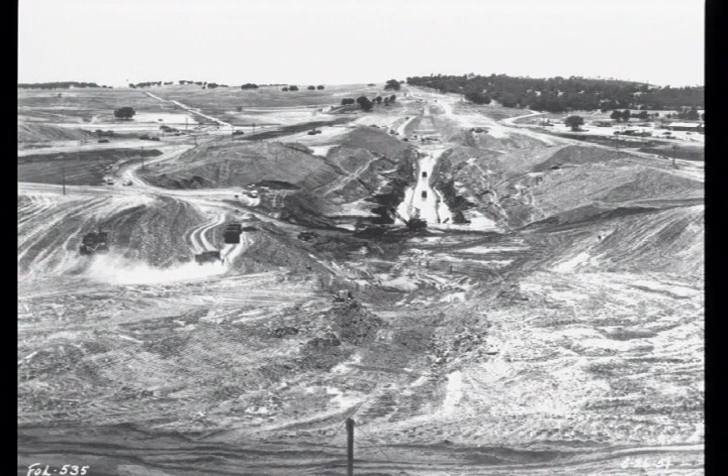Because removing and replacing large quantities of foundation materials is very expensive, the usual solution has been to leave natural soils in place under parts of the dam. Until the early 1970s, it was common practice to leave apparently competent soils in place under the dam. These alluvial soils, which contain large amounts of sands and gravels, were deposited by the river or stream that was being dammed. Sands and gravels that are deposited by running water are relatively less dense than soils that develop in place. When they are exposed to moderate to large earthquakes, these sands and gravels may lose strength because they liquefy.

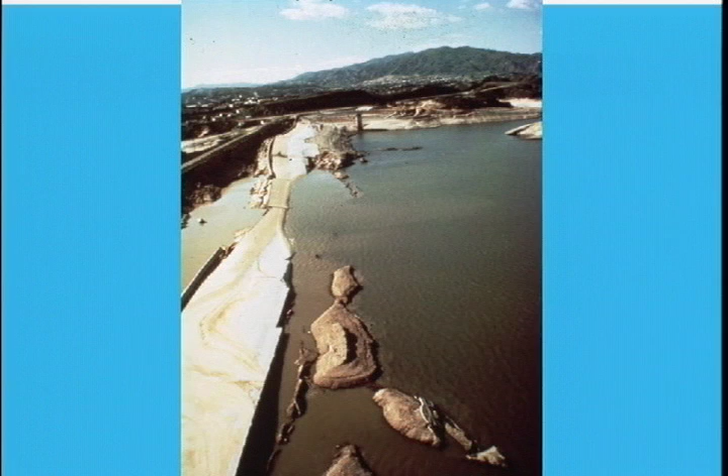Engineers began to explore and understand this condition in the 1960s, and their initial understanding was supported by the San Fernando earthquake of February 1971. That earthquake nearly failed the lower San Fernando Dam and damaged the upper San Fernando Dam. Over 80,000 people were evacuated from their homes while the reservoir was lowered to a safe level under emergency conditions by using large pumps. This event brought about the reevaluation of dam safety criteria and re-examination of the designs of existing dams exposed to earthquakes in the United States.

As the liquefaction phenomena was better understood, it became apparent that natural materials left in place under many dams could not support them during an earthquake. These dams would have to be modified to protect public safety and maintain the water levels required for water storage, recreation, flood control, and hydropower generation.

The modifications could generally be of two types. One would be to completely remove and replace all the liquefiable soils in the dam foundation. This usually involves excavating the dam to gain access to the foundation, a time-consuming and costly effort that often requires lowering or draining the reservoir. Typically, this approach can require that large amounts of foundation soils be excavated and replaced. A variation of this method is to excavate less soil and replace it with a structural element of some kind that is stronger than soil.

The second method involves improving the strength of existing foundation soils. This method can often avoid having to excavate the dam and foundation or lower the reservoir. These incentives have resulted in several methods of improving soils in situ being successfully used to modify dams to resist earthquakes. We are fortunate to have one of the leading authorities in the field of modifying soils on site, Dr. James K. Mitchell, discuss the general field of ground improvement in this set of videos.

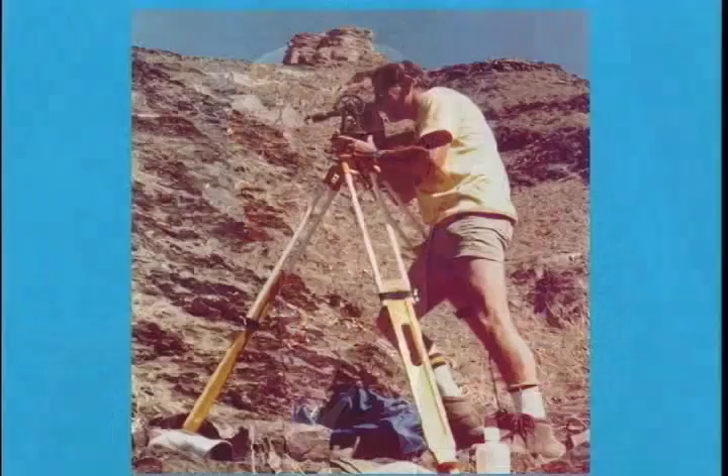Professor Mitchell received his science doctorate from the Massachusetts Institute of Technology in 1956. He then spent several months at the Waterways Experiment Station in Vicksburg, Mississippi. This was followed by active duty with the U.S. Army Corps of Engineers before joining the faculty at Berkeley in 1958. A member of both the U.S. National Academy of Engineering and the National Academy of Sciences, Dr. Mitchell's achievements have been recognized by many awards.

These include the following from ASCE: the Norman Medal twice, the Middlebrooks Award 3 times, the Walter L. Huber Research Prize, and the Karl Terzaghi Award. He delivered the 1984 Karl Terzaghi Lecture and the 1991 Rankine Lecture. He did extensive research on lunar soil properties and served as principal investigator for the soil mechanics experiment, which was part of the Apollo moon missions 14 through 17.

NASA awarded him the Medal for Exceptional Scientific Achievement for this work. Dr. Mitchell has been active in a number of professional societies. He is a fellow and honorary member of the American Society of Civil Engineers. He has chaired the Geotechnical Board of the U.S. National Research Council, been vice president of the International Society for Soil Mechanics and Foundation Engineering, and has served on and chaired a number of other committees.

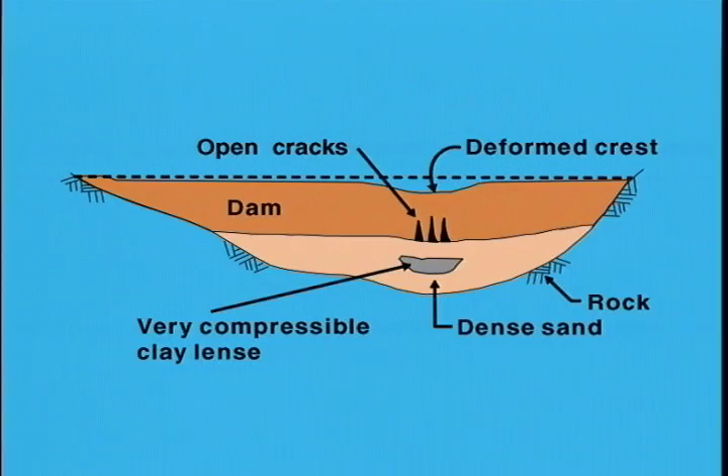Embankment dams founded above thick layers of alluvial materials are likely to utilize upstream blankets or deep cutoff walls for seepage control. Both the blanket and the embankment may be susceptible to cracking as a result of differential settlement in the foundation, drying, or settlement of the embankment and core. These problems are aggravated if the foundation materials are highly compressible.

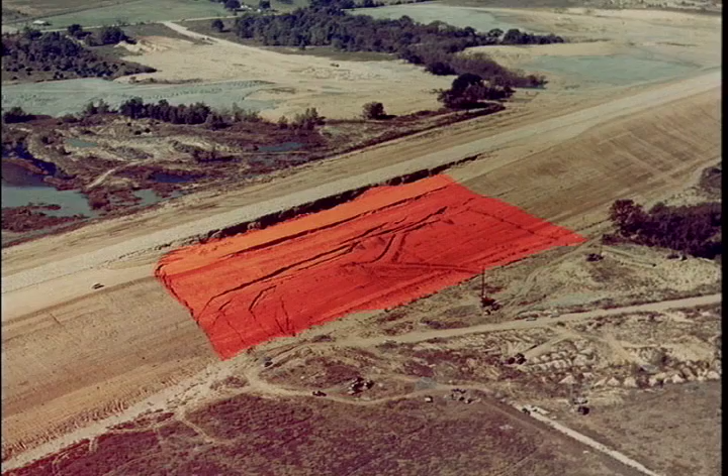In addition, if the foundation soils are weak, there may also be risk of bearing capacity or stability failure beneath the embankment toes unless rather flat embankment slopes are used. Weak layers in the foundation may be the source of instability, as shown in the photograph of the failure at Waco Dam in Texas. Excessive creep deformations in the foundation clays at the tar sands tailings dam in Alberta, Canada, have resulted in significant horizontal displacements of the embankment.

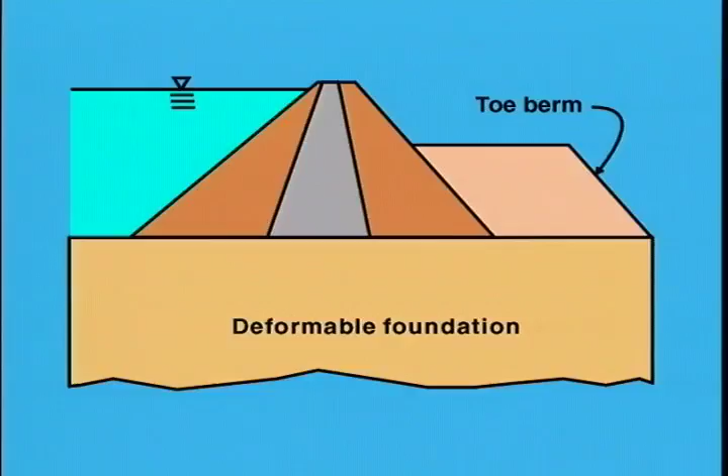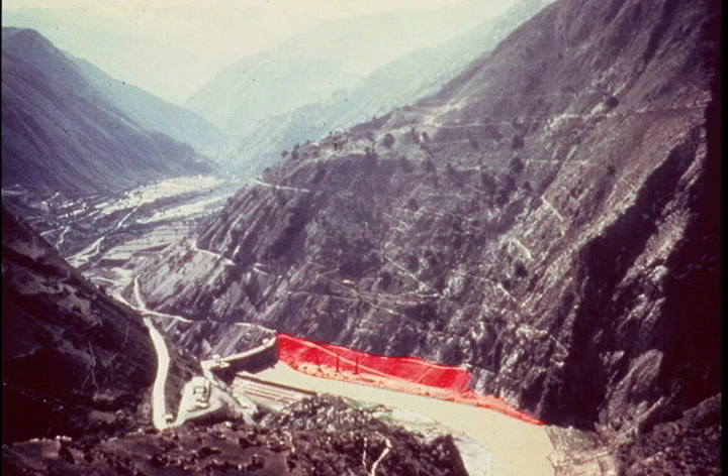The toe berm at the base of the steep slope at the Tablachaca Dam in Peru, shown in this photograph, was one of several slope stabilizing measures used for protection of the dam and the reservoir. In some cases, however, reservoir restrictions, hydraulic constraints, or space limitations may not allow for these solutions, and other treatment methods may be required. Several forms of ground modification may be used to stiffen and strengthen the ground, including densification, cementation, and reinforcement. The methods selected in any case will depend on the soil types and stratigraphy, the depth of treatment required, and whether a site is being prepared for a new dam or an existing dam is being retrofitted.

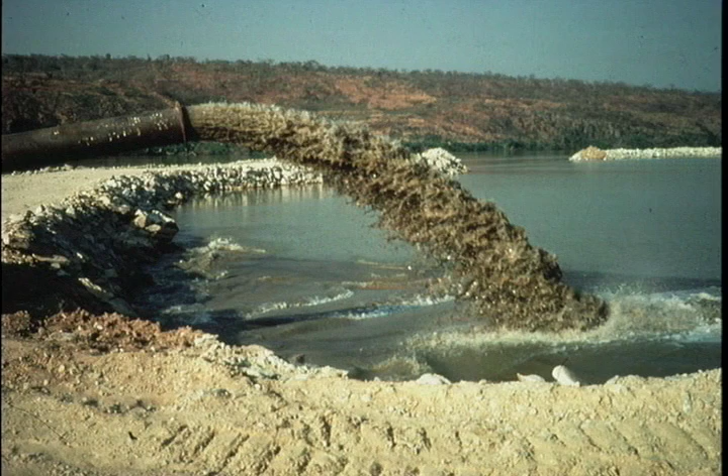Although unlikely to be a problem in properly designed and constructed new rolled fill dams, the embankments of some dams may be susceptible to failure, especially in the case of hydraulic fill structures. Many older dams were constructed of hydraulic fills, and hydraulic filling is the most widely used method for construction of tailings dams. Hydraulic fills, because of their loose and potentially liquefiable state that results from the depositional process shown in this photograph, are susceptible to sudden collapse and flow failures. The Fort Peck Dam failure on September 22, 1938, is a good example of this.

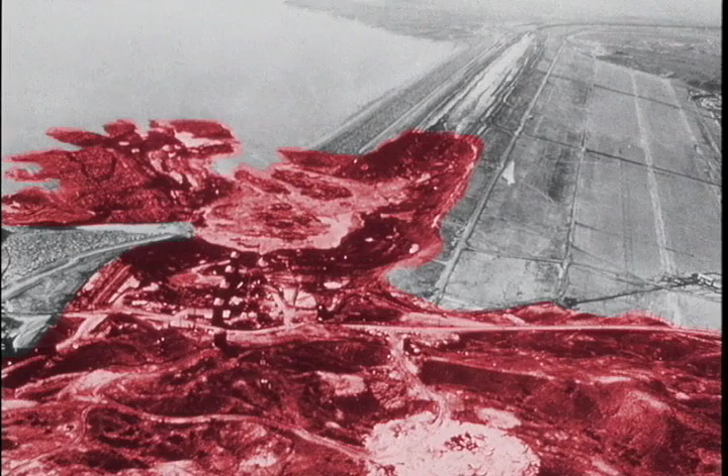Embankment construction by the hydraulic filling method had reached within about 20 feet of the design crest elevation. More than 5 million cubic yards of material moved upstream in a period of about 10 minutes. 8 workers lost their lives in the event.

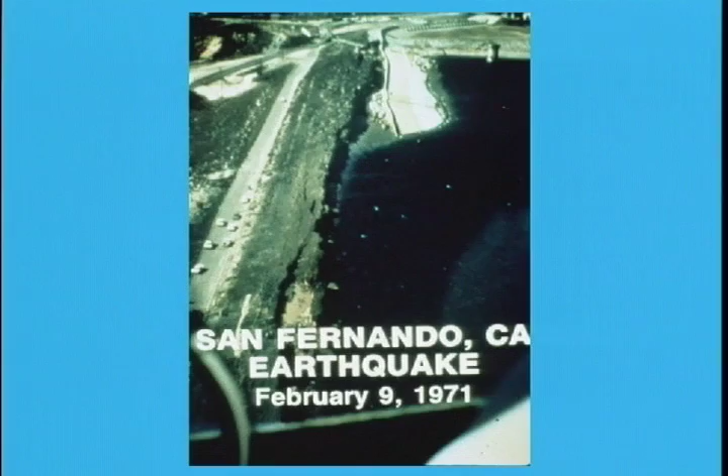Flow failures may be triggered by excessive static loading, as was the case for the Fort Peck Dam failure, but more often they are caused by seismic events. Some examples of dam failures caused by earthquake shaking include the Hebgen Dam, Montana failure in the magnitude 7.5 to 7.8 earthquake in 1959, the El Cobre Dam failure in Chile in 1965, and the Lower San Fernando Dam failure in Southern California in 1971.

In this video, I examine methods and designs for ground improvement to reduce damage and to prevent failure resulting from the above causes: settlement and excessive deformation under static load, and liquefaction flow and stability failures under dynamic or earthquake load. I will not discuss the investigations and analyses that must be made to see if there is a problem. Rather, I assume that the existence of inadequate embankment or foundation conditions has been confirmed.

I will not consider the common treatments and components of dams, such as grouting, cutoff walls, and filters, that are associated with foundation preparation and seepage control. These are thoroughly described by Peck, Deere, and Lowe in other videos in this series. I will, however, touch on the use of soil cement and roller compacted concrete in hydraulic structures. These materials can provide economical and structurally sound components for both the rehabilitation of existing dams and for new dam construction.

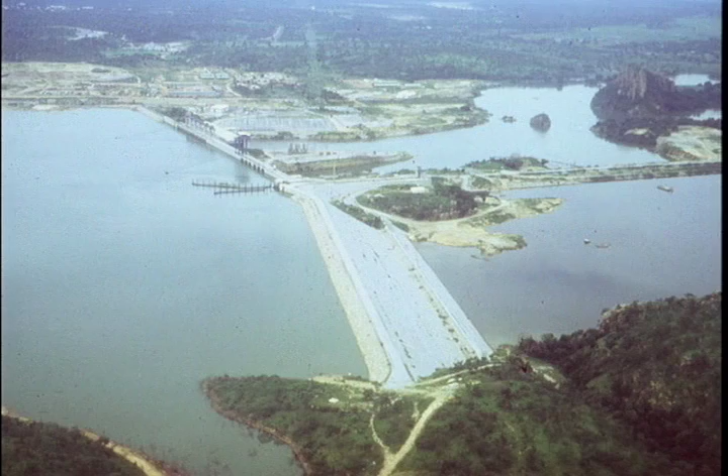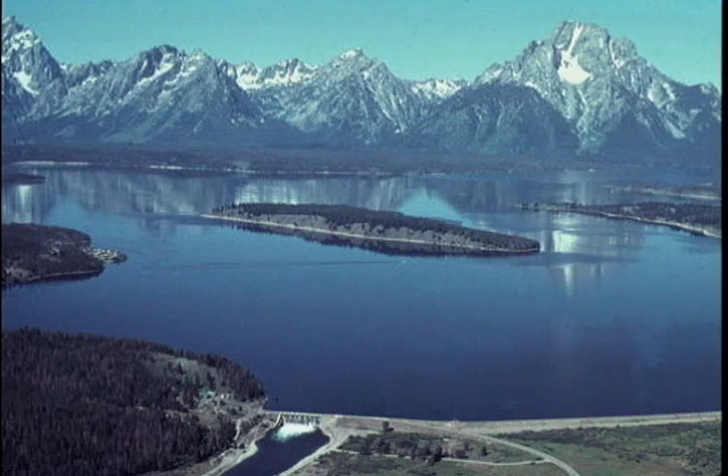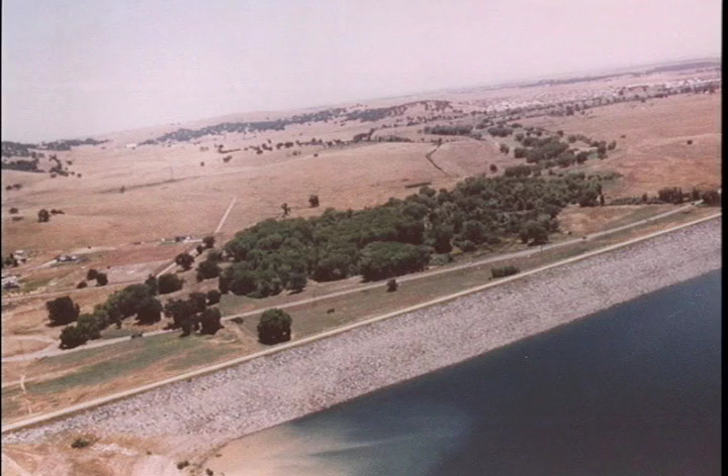Second, the Jackson Lake Dam, Wyoming. Here, an existing dam was replaced following foundation improvement using deep soil mixing and deep dynamic compaction. And third, the Mormon Island Auxiliary Dam, which is an example of the use of deep dynamic compaction, stone columns, and drains to mitigate the liquefaction risk to an existing dam foundation.

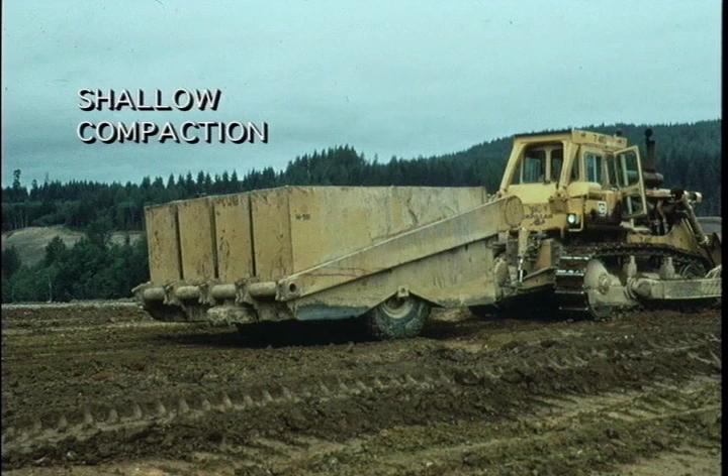Currently available ground improvement methods that may be used to prevent excessive deformation or failures of dams under static and dynamic loads may be divided into several categories. The first category is shallow compaction using rollers. This is the most widely used method for construction of embankments. It is the best and most economical method for assuring properly densified material of known properties and behavior. It can be used to densify virtually all soil types. The major limitation of compaction by rollers is that the effective depth of treatment is limited to about 1 meter, perhaps up to 2 meters if very heavy equipment is used.

I will not cover details of earthwork compaction by rollers here, except to note that replacement fills, buttress fills, and soils that are stabilized with admixtures, such as soil cement and roller compacted concrete, are usually constructed in compacted lifts using rollers. These types of fills have a very important place in construction of new dams, the rehabilitation and expansion of existing dams, and the mitigation of ground failure risk to existing dams.

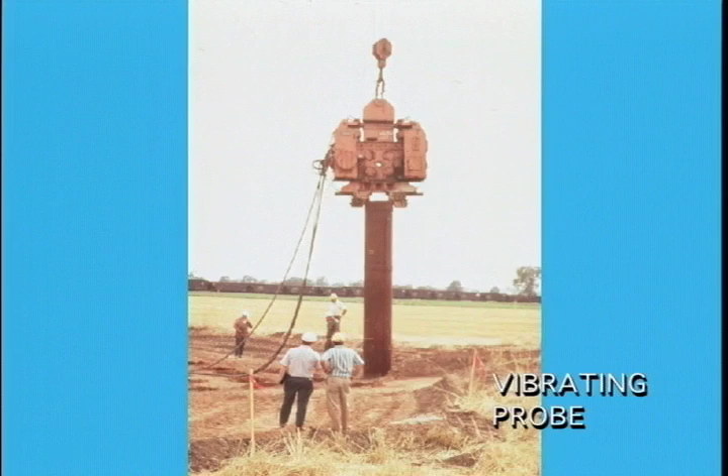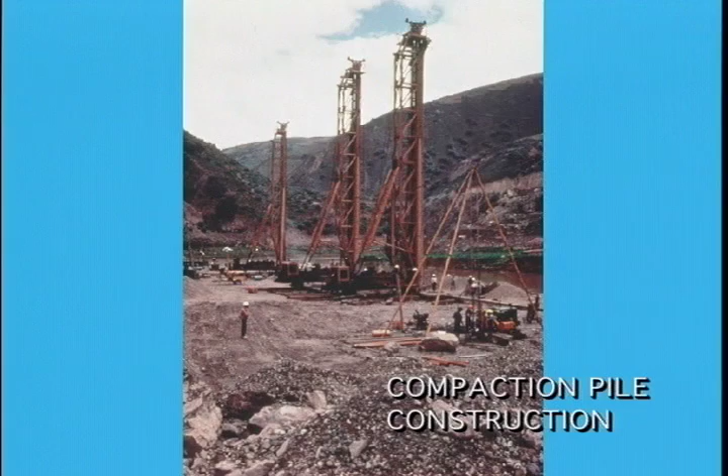The second category is densification by deep compaction. Methods in this category, and illustrated by the photos and the drawings that follow, include compaction by vibrating probe, vibro compaction, also called vibroflotation, compaction piles, deep dynamic compaction, and explosive compaction. The third category of treatments includes ground improvement by combined displacement, replacement, and densification.

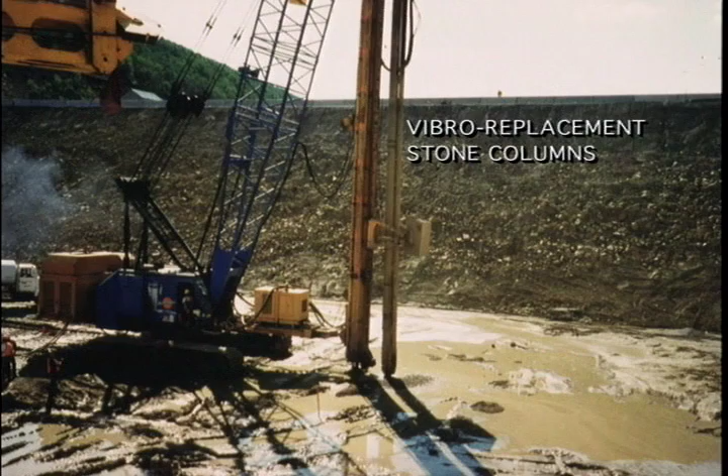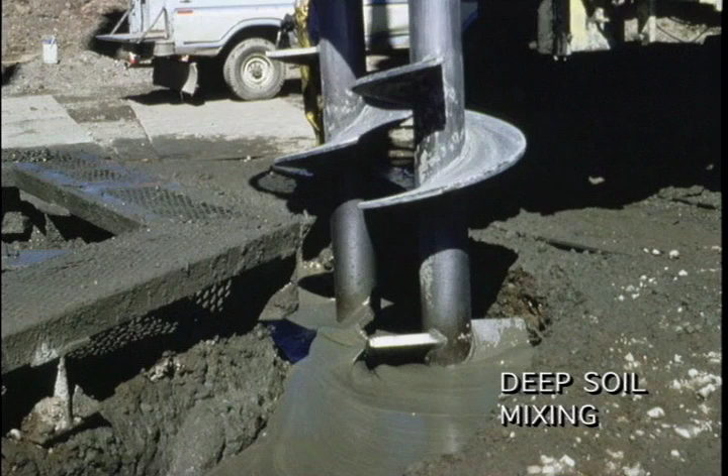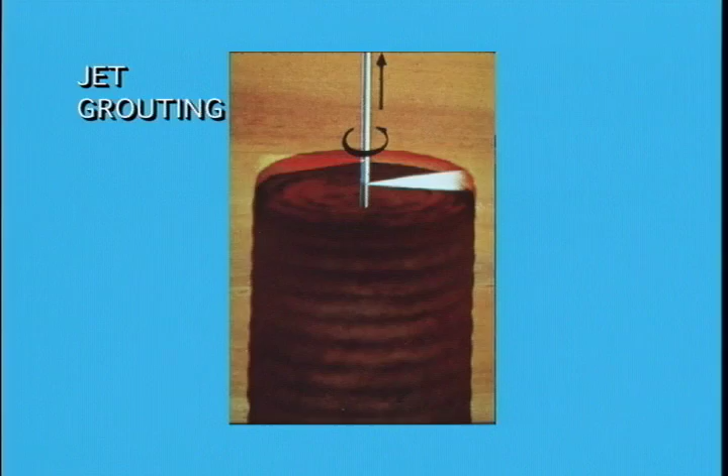Vibro replacement stone columns and compaction grouting are the most widely used methods in this category. The fourth category is ground strengthening by reinforcement. Deep soil mixing and jet grouting are technologies by which columns, walls, and cells of various configurations can be constructed in the ground. The strengthened and reinforced ground is then less compressible and more resistant to settlement, more resistant to shear failure, and also to liquefaction. Finally, drainage for the purposes of consolidation of foundation soils, for keeping excess water from treated zones, that is, to intercept pore pressure plumes from adjacent liquefied soil, and for reducing liquefaction potential.

I will examine each of these methods in more detail later. However, there are some considerations of a general nature that are usually very important in any project, and I want to discuss them briefly first. Vibration and displacement are both useful for densification of most cohesionless soils. The idea is to break down the soil structure and rearrange the particles into a denser, more stable fabric.

Experience shows that it may be easier to densify from a low relative density to a moderate relative density than it is to densify from a moderate relative density to a high relative density. Saturated soils containing silt and clay are much more difficult to densify by vibratory and impact processes than are clean, cohesionless soils. Vibration without displacement is likely to be ineffective in soils with fines contents greater than 15 to 20%.

In such materials, some displacement, such as accompanies compaction grouting, stone column construction, and installation of compaction piles, is normally required. Experience shows also that clay fines are much more inhibiting than silt fines, by a factor of 5 or more. Furthermore, the level of improvement that may be attained, as measured, for example, by the standard penetration test N value, is considerably less for soils with high fines content than in clean, cohesionless soils.

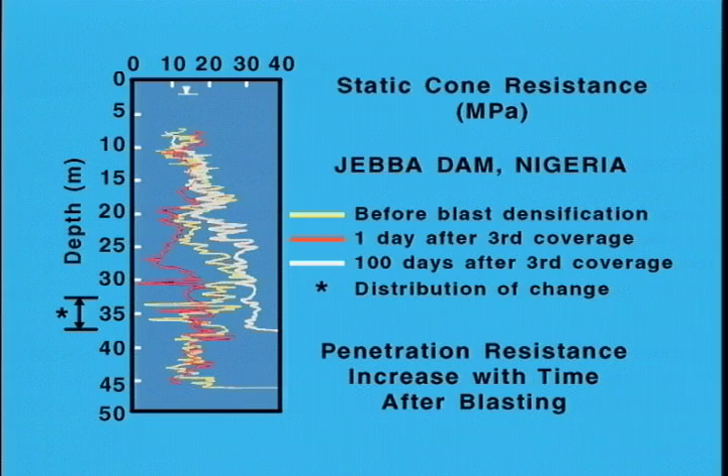Very often, deep densification of soils is followed by a period of several weeks to months, during which the apparent strength and stiffness, as measured by penetration tests and shear wave velocity measurements, continues to increase above the values measured immediately following the treatment. Examples of this include the cone penetration test resistance values measured in the Jebba Dam foundation after densification by deep blasting. The figure shows cone tip resistance as a function of depth before deep blasting and at 2 times following treatment. Significant increases during the several weeks following treatment are evident.

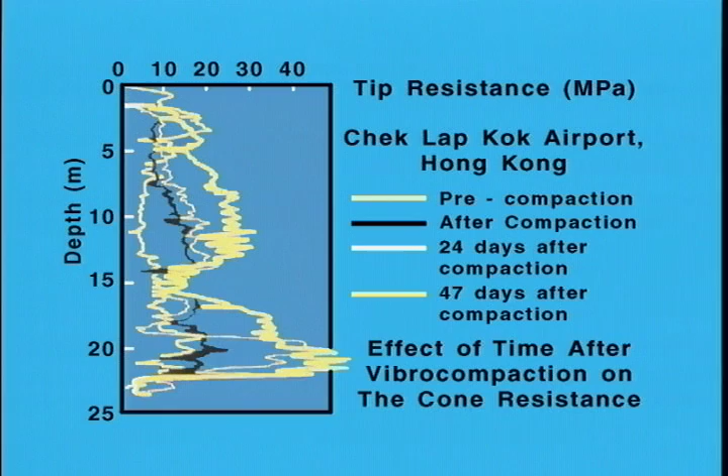The test results for the hydraulic fill placed for the new Chek Lap Kok Airport in Hong Kong after densification by vibro compaction are another illustration of this phenomenon. The exact mechanisms responsible for the time-dependent improvements in properties are not fully known. Both chemical and physical processes have been hypothesized. Whatever the causes, the beneficial consequences are of sufficient magnitude in many cases that they should be taken into account by specifying a minimum time after treatment before final evaluation of the improvement obtained.

Several methods are used for evaluating the results of ground improvement. These include standard penetration tests, cone penetration tests, Becker penetration tests, and shear wave velocity measurements, which are most commonly used for evaluation of deep densification. Sampling is often carried out when treatments employing admixtures are used. In virtually every project, some simple observations and estimates can be very valuable for assessing the results obtained relative to the project requirements.

To avoid uncertainties and disputes, it is essential that a comprehensive characterization of the project site conditions be done before treatment. Without reliable before measurements to compare with the after measurements, it is nearly impossible to understand what has been accomplished. Methods that are used to assess the effectiveness of treatment include the following. Surface settlement or heave measurements are simple and should always be made. Soil backfill quantities added to holes and craters should always be measured. Samples of materials treated using admixtures should always be taken and tested.

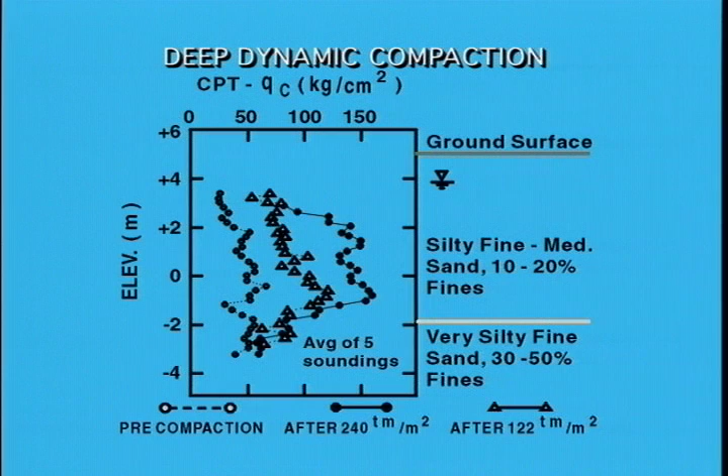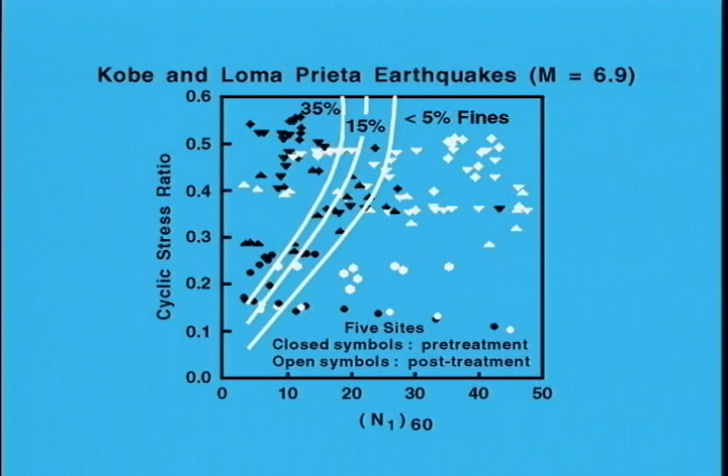Before and after comparisons in the form of SPT N values plotted on a liquefaction resistance plot of cyclic stress ratio as a function of the normalized standard penetration resistance, or N160, are shown here. The region to the left of the curve represents liquefaction likely, whereas the region to the right of the curve represents liquefaction unlikely. Data for the several sites shown are separated into values for untreated and treated ground. The actual soil behavior in the Loma Prieta and Kobe earthquakes was consistent with these values.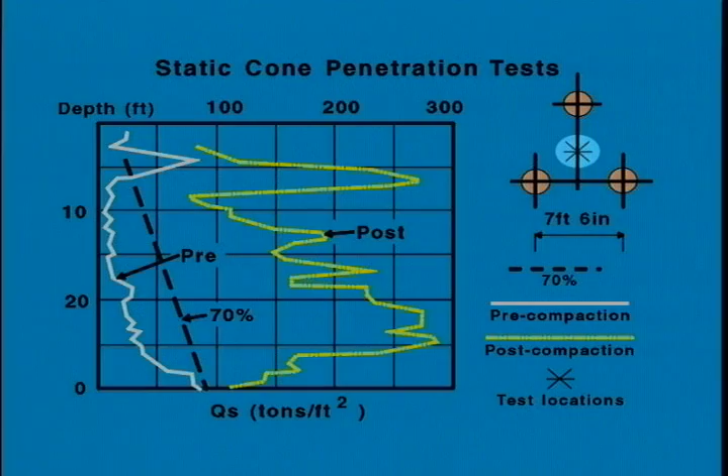When penetration tests are used or samples are taken, usual practice is to measure or sample at the locations where the improvement is likely to have been the smallest. Usually, this will be at the center of a triangular or square array of densification probe insertion points. This is a conservative approach, but it is justified because of uncertainty about how large weak zones can be before the overall performance of a site is adversely impacted. All of these considerations must be kept in mind for each project.

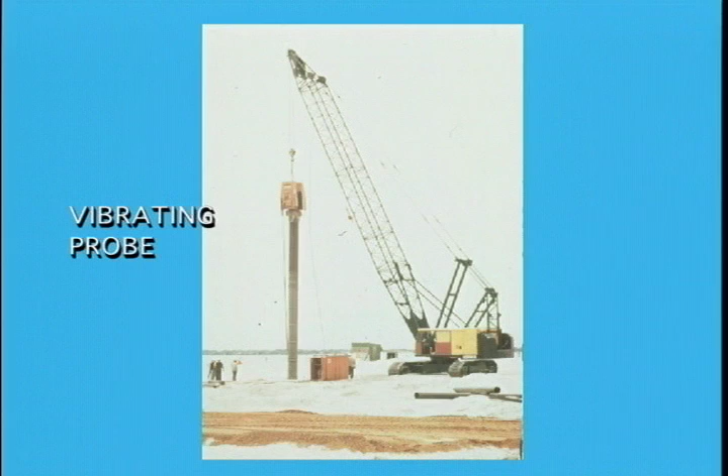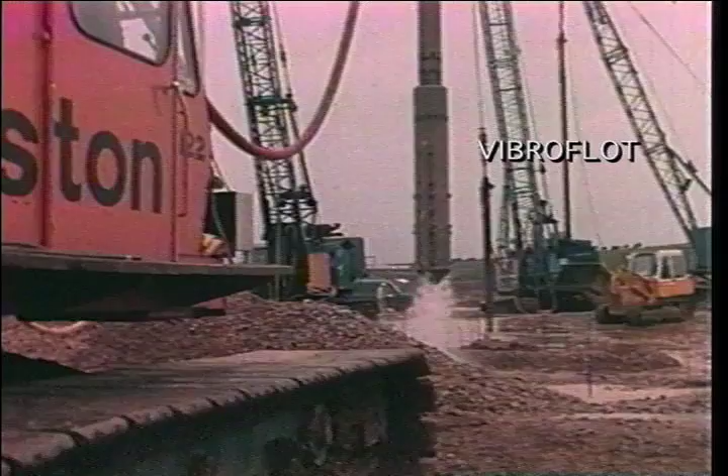Vibrocompaction densification of cohesionless soils is accomplished using vibrating rods, pipes, and probes. The photo shows a simple system, which consists of a closed-end steel pipe pile, about 30 inches in diameter, suspended by a vibratory pile hammer. In systems such as this, where the energy input is at the top, the effective depth of treatment is limited, owing to energy losses into the ground along the probe. Most commonly in the U.S., a vibrofloat is used, in which a horizontally oscillating vibrator located near the bottom provides energy input directly at the depth where the soil is being densified.

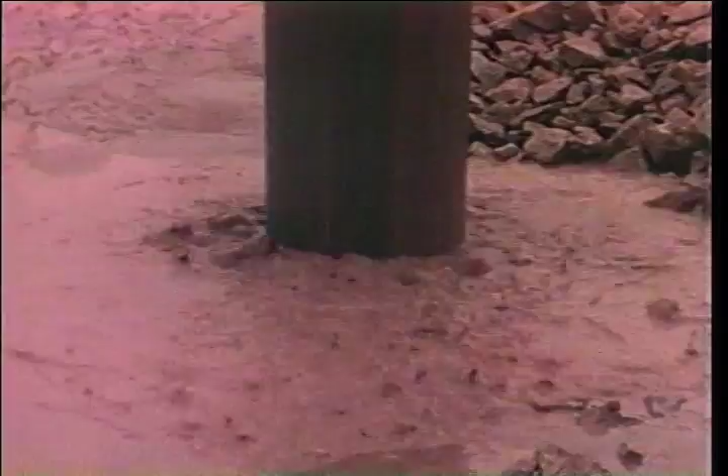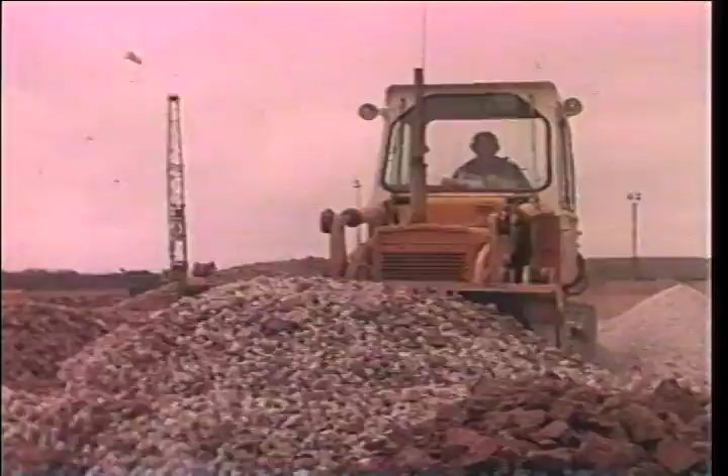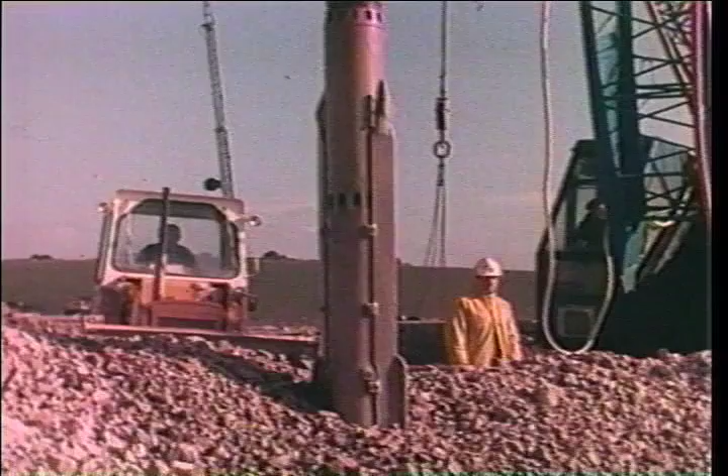The vibrofloat is jetted or vibrated to the desired depth, and then the ground is compacted from the bottom up, backfilling as you go. Backfill consumption is typically about 1 cubic meter per meter of column. The vibrator frequency is usually 1800 or 3000 RPM. The ground is compacted radially away from the probe. The backfill that is dumped in around the probe may be either the native sand or imported clean granular material.

Vibrocompaction is best suited for granular, free-draining soils, that is, soils with a hydraulic conductivity greater than about 10 to the minus 6 meters per second. A 10% particle size greater than 0.03 millimeters is desirable. The effective treatment of clean sand may result in increases in standard penetration test N160 values to 25 blows per foot or more, and cone penetration resistance values of 15 megapascals or more. Vibrocompaction has been used effectively to depths up to 100 feet.

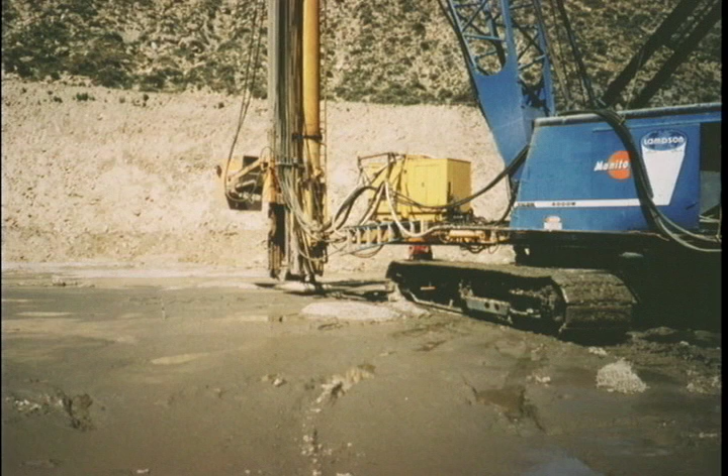Vibro replacement stone columns are constructed in a manner similar to the vibrocompaction process, except that a clean gravel or crushed stone backfill is used. Vibro replacement is suitable for soils containing a higher fines content than can be effectively densified using vibroflotation alone. In the wet stone column process, water jets assist in advancing the probe to the desired depth, and they wash finer material to the ground surface. In the dry process, the backfill is dropped down a pipe alongside the vibrofloat, and the in situ soil is pushed radially outward from the probe.

Properly constructed stone columns are typically about 3 feet in diameter, with the diameter being larger in weak soils than in stronger soils. Stone columns have been used to depths greater than 60 feet. In addition to the densification of the in situ soil by vibration and displacement, the stone columns act as reinforcing elements because of their higher strength and greater stiffness relative to the soil. As the columns have much higher hydraulic conductivity than the native ground, they also can provide drainage.

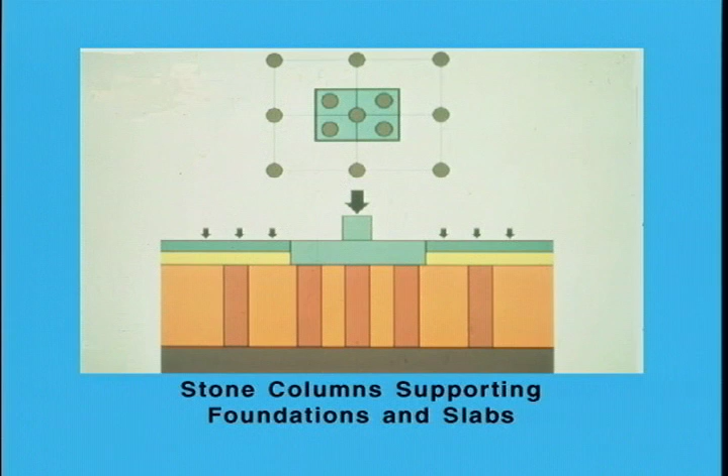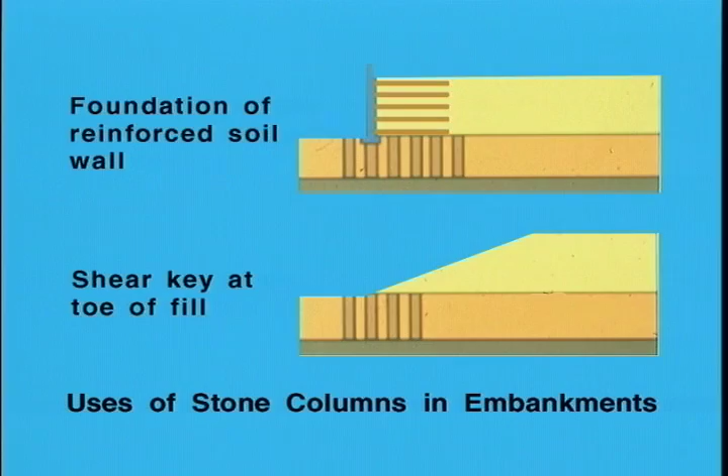Thus, stone columns can be used in a variety of ways, as we see in the diagrams, including support of vertical loads for increased bearing capacity and decreased settlement, increased soil resistance along potential sliding surfaces for improvement of stability, mitigation of liquefaction potential, and as an aid in drainage. Methods for the analysis of the composite column soil system are available.

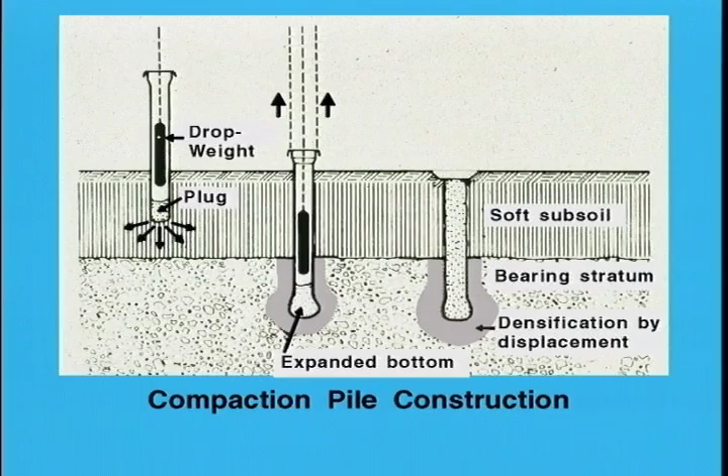Ground improvement using compaction piles is accomplished by driving displacement piles or by driving a replacement backfill out of a casing as it is withdrawn from the desired depth of treatment. Compaction piles are typically spaced 3 to 10 feet on center, and they have diameters of the order of 3 feet after compaction. Compaction piles densify the soil by displacing a volume of soil equal to the pile volume and by vibration during driving. The installation of compaction piles may be relatively slow and expensive. Improvements obtained using compaction piles are usually very good, however.

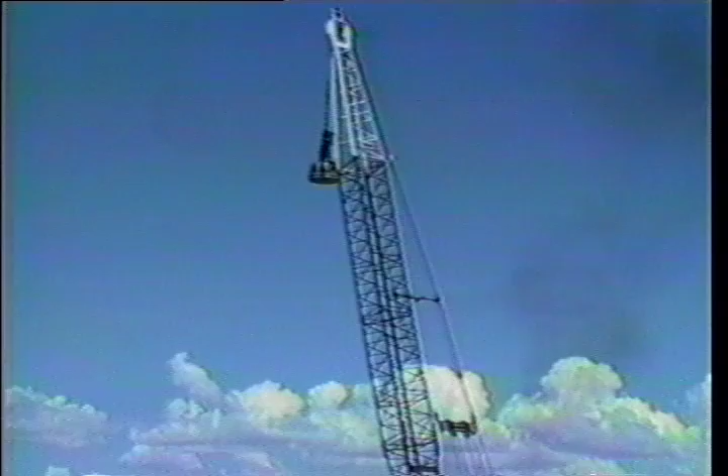Deep dynamic compaction is much like Proctor impact compaction done in the laboratory, only on a much grander scale. It is an economical method for densification of saturated cohesionless soils, collapsing soils, or partly saturated soils to depths of up to 30 to 40 feet. It is restricted to the improvement of relatively large open areas where the closest impact points are 100 to 125 feet away from existing structures and facilities. Typically, weights of up to 30 tons are used, dropped from heights up to 100 feet. From experience, it is common to use a weight in tons approximately equal to the height of drop in meters.

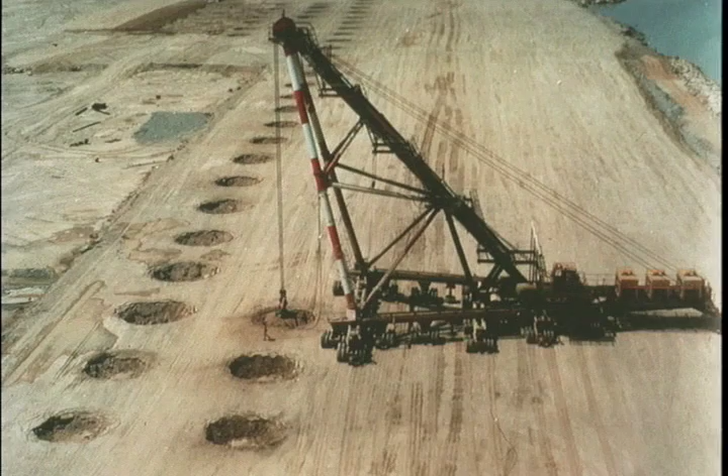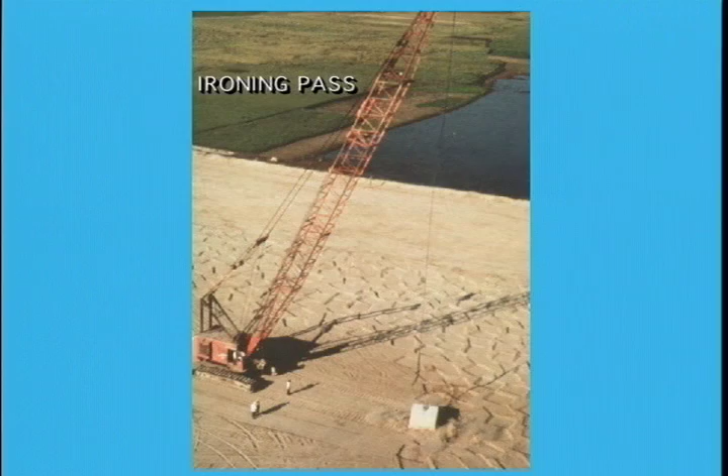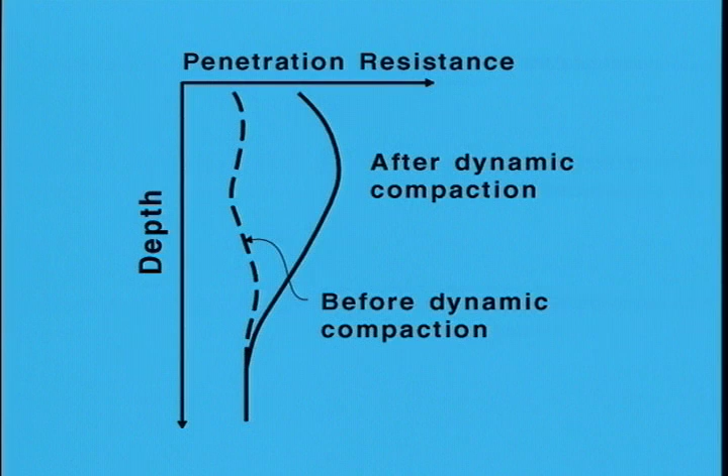The craters created by the drop weights are usually backfilled periodically, and a final ironing pass may be used to densify the soil near the ground surface. Greatest densification is a few feet below the surface, with effectiveness decreasing with further depth. A schematic of the variation of post-treatment density with depth is shown in the diagram. In general, the effective treatment depth in meters equals 0.3 to 0.7 times the square root of the product of the drop weight in tons and the drop height in meters. The finer grained the soil, the lower the value of the coefficient.

Weights are dropped in a grid pattern across the site, with several drops at each impact point. For the initial coverage, the impact points are laid out in a grid pattern with spacings of the same order as the desired treatment depth. For subsequent coverages, intermediate impact points are used. Typically, 2 or 3 coverages are used. Design guidelines are available to aid in the selection of the total energy input required and for estimation of the improvement that is likely.

Explosive compaction, or densification by deep blasting, can be an economical method for improvement of saturated, clean, cohesionless soils. It can be used in soils containing cobbles and boulders that could inhibit densification using vibro probes. It can be used to treatment depths well over 100 feet, depths greater than can be densified by the other methods that have been described. The general procedure for blasting compaction beneath the ground surface is: first, lay out a pattern of charges. Second, install a casing to the desired depth of a charge location. Third, place the charge in the casing. Fourth, backfill the casing. And fifth, detonate the charge.

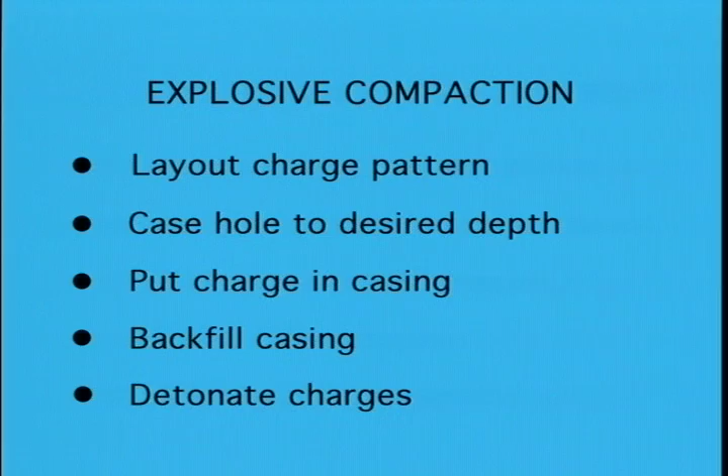Blast densification is much like a series of small earthquakes. It causes loose, saturated, cohesionless soils to liquefy. Compression waves, or P waves, from blasting generate pore pressures that break the soil structure apart. Shear waves, or S waves, cause soil grain displacements and densify the soil structure. Excess pore pressure may be vented at the ground surface in the form of sand boils. There is often a large time effect, that is, an increase in strength and stiffness with time, but without further increase in density, perhaps due to the time-dependent dissipation of gas pressures and chemical effects.

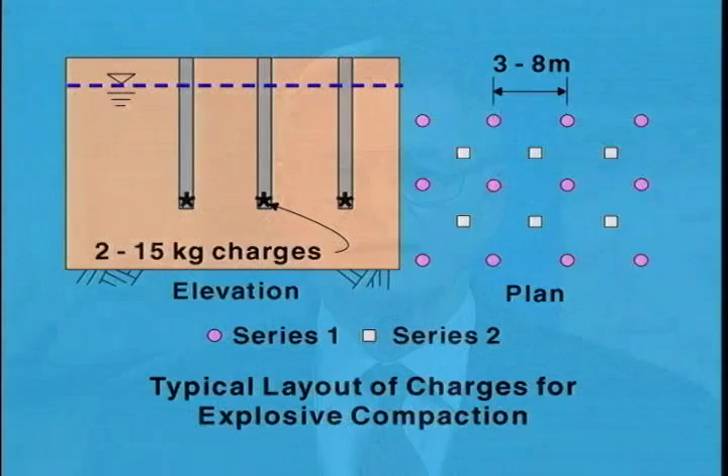Blasting is best for soils with an initial relative density less than about 50 to 60%. Full saturation and good drainage are needed. Silts and clays impair the effectiveness of the method because they damp the explosive energy and they inhibit drainage. Experience-based guidelines are available to aid in the selection of charge sizes, spacings, depths, and numbers of coverages. For most projects, a test program is carried out prior to the final design and production blasting. Charge weights of 2 to 15 kilograms at spacings of 3 to 8 meters are typical. An effective blast densification program may produce a surface settlement of 2 to 10% of the treated layer thickness.

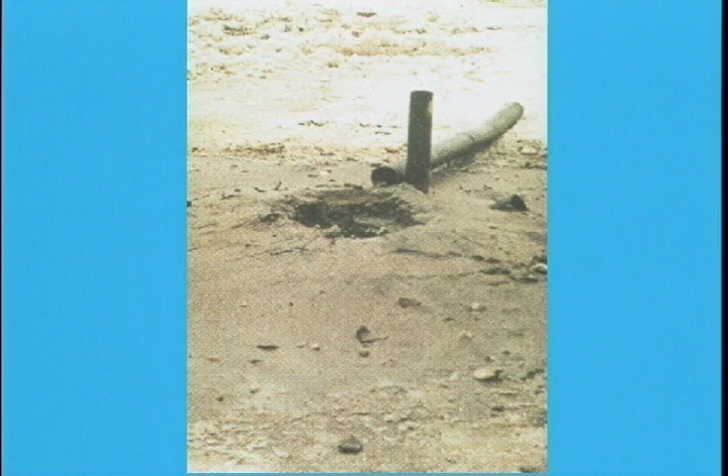The photo shows a blast hole after detonation at the Sainte Marguerite Dam site in Quebec. The post-blasting sand boil is evident. At this site, blasting was done during the winter so that the frozen river could be used as a working platform.

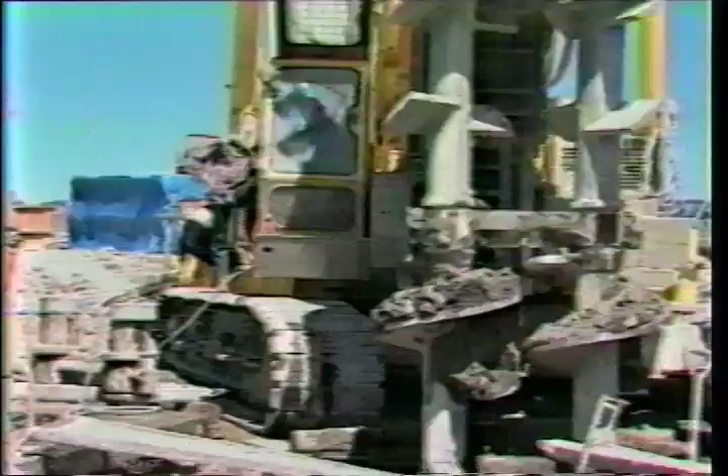In the deep soil mixing process, large diameter augers, acting alone or in groups of up to 3 or 4, drill to the desired treatment depth.

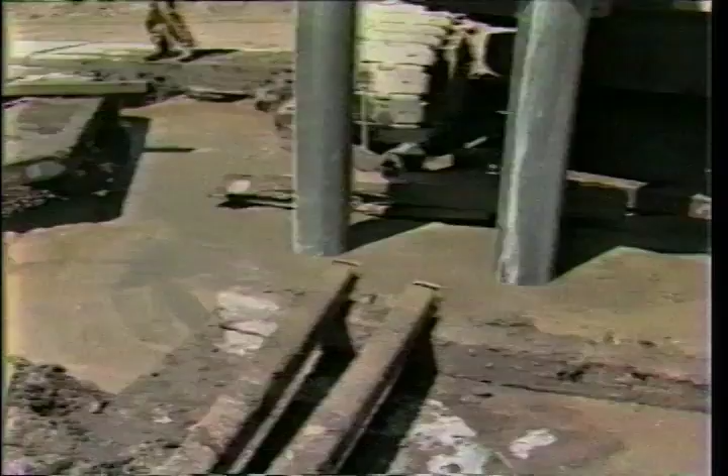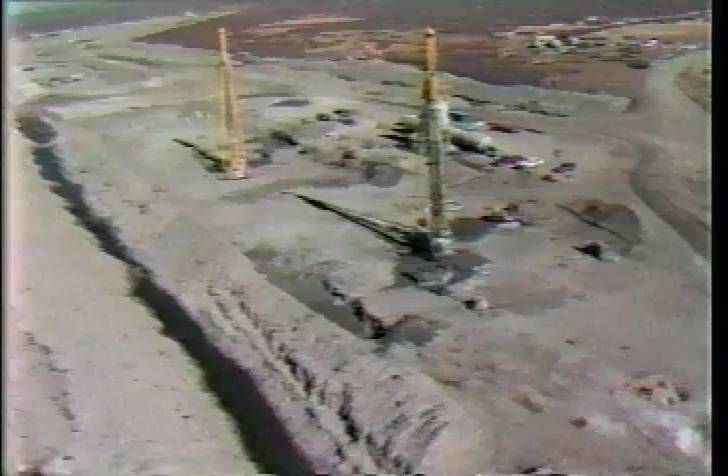Cement or other stabilizing material is injected as the auger works its way up out of the hole. The soil cement mix that is left behind hardens to form a strengthened column or wall. Individual auger and column diameters up to 6 feet or more are possible. However, auger diameters of about 2 to 3 feet are more usual.

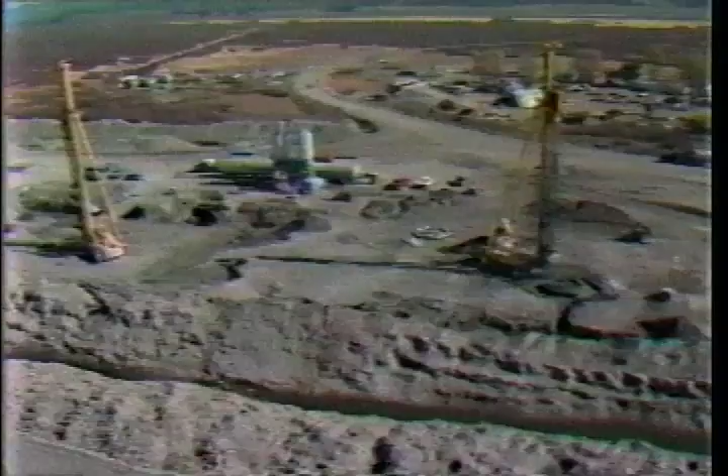The technology of deep soil mixing has developed rapidly in recent years, and deep soil mixing applications can be expected to increase in the future. The strength of the mixed soil in DSM columns is likely to be in the range of about 100 to several hundred pounds per square inch, depending on the soil type and state, and the admixture type and amount.

Analyses and field performance records show that a relatively weak soil reinforced with deep soil mixed columns will act as a composite material for the purposes of supporting vertical loads, or providing excavation support, or acting as a gravity wall. The native soil replacement ratio for such applications is typically 25 to 35%. The replacement ratio is the ratio of the plan area of the cement columns to the total plan area of the treated ground.

Although this is a relatively slow and expensive process, compaction grouting can be carried out in small and confined areas. The treatment zone can be limited to the weak or liquefiable layers. There are no depth limitations, and it can be used in almost any soil type. Compaction grouting can be used to fill voids, to densify collapsible soils, and to consolidate partly saturated soils.

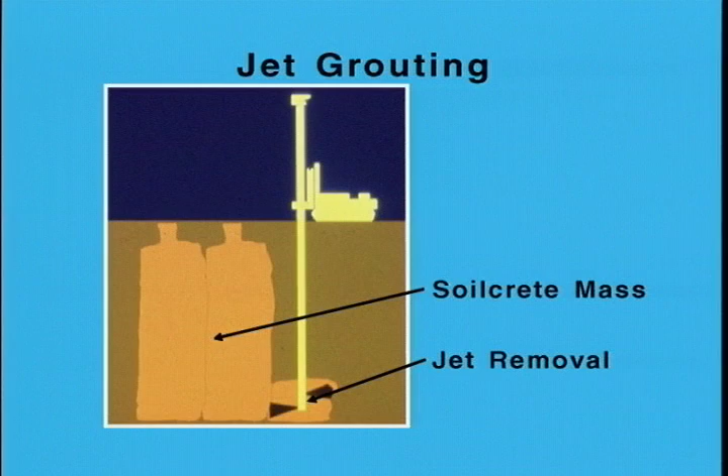In calculating the replacement ratio and in assessing the overall densification associated with compaction grouting, it is necessary to account for lateral displacement of the adjacent ground and any surface heave that may occur. With jet grouting, very high, that is several thousand psi, injection pressures are used to jet water and water-cement mixes into the ground. The schematic diagram and the photograph show the jet grouting process.

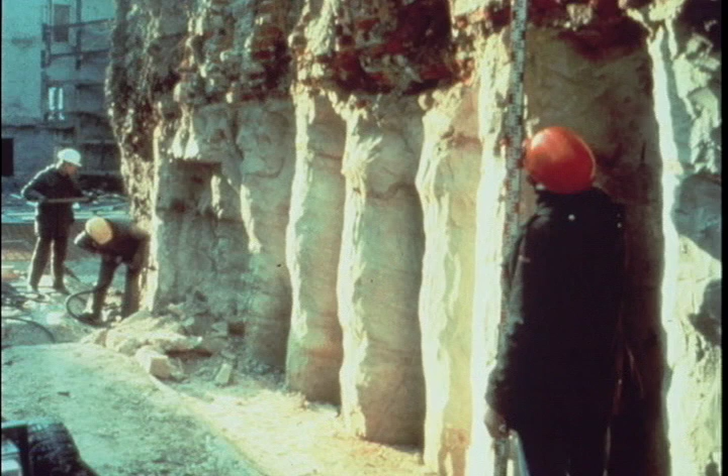Jet grouted columns are typically about 3 feet in diameter in U.S. practice. However, larger columns are possible. Single rod for grout jets only, double rod for separate grout and air jets, and triple rod for separate injection of grout, water, and air jet grouting systems are used. Some applications of jet grouting include scour protection, underpinning, excavation support, and ground strengthening and impermeabilization around tunnels and shafts.

Although an expensive method for ground treatment, jet grouting has several unique advantages, including: nearly all soil types can be treated. There is some control over design strength and hydraulic conductivity. The treatment locations can be localized. Treatment at large depth is possible. For example, the foundation material at Terzaghi Dam in British Columbia, Canada, was jet grouted to a depth of about 500 feet. It is possible to work in confined and restricted areas. There are no large ground vibrations.

As noted earlier, roller compacted concrete, or RCC, has become a widely used material in dams and other hydraulic structures. This is because of its high strength, its relatively simple formulation, its ease of construction, and its low cost. RCC is used for such purposes as buttressing existing slopes and dams, protection of dams from overtopping, linings for canals and channels, and filling cavities. It has been used as the embankment material for construction of many dams in recent years.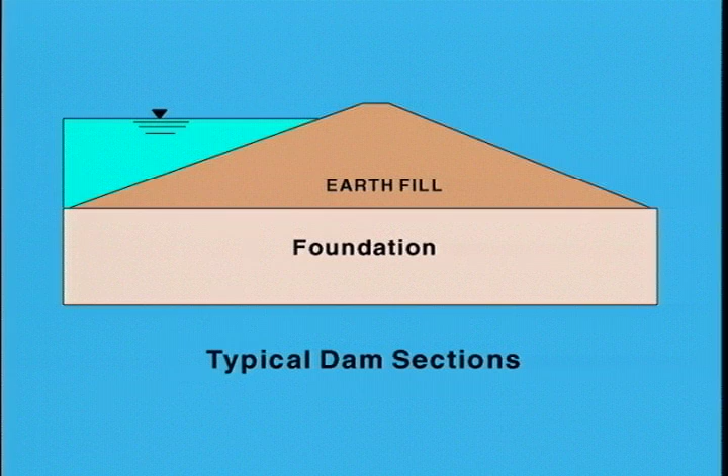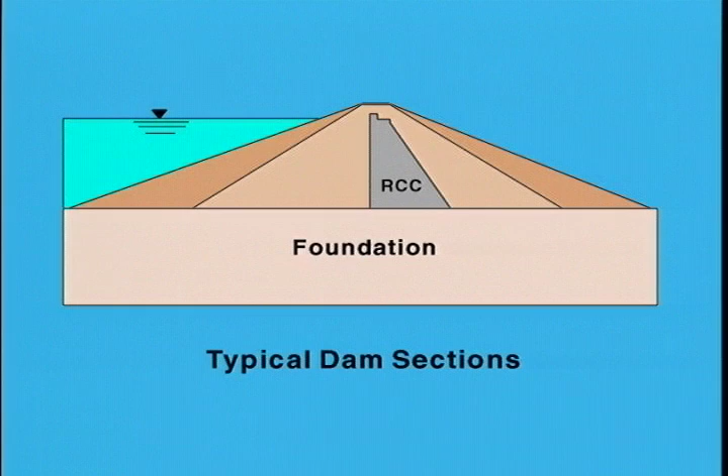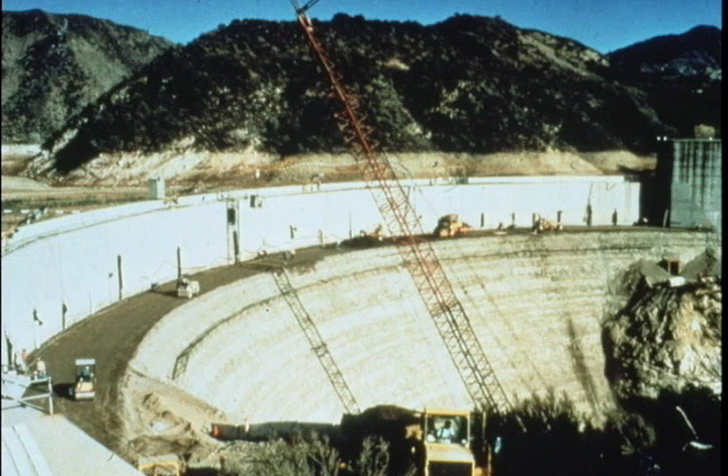The diagram shows a comparison between the cross-sections of typical earth fill, rock fill, and RCC dams. Given that similar construction procedures are used for each material, it is clear that the higher material cost of RCC can easily be offset by the greatly reduced quantity of material that is required. The photo shows the 195-foot-high Gibraltar Dam in Southern California that was recently retrofitted using a roller compacted concrete buttress section to improve seismic safety.

A typical roller compacted concrete contains coarse to fine aggregate with a fines content of 0 to 15%. Maximum aggregate size is 1 to 3 inches. The cement content is 100 to 500 pounds per cubic yard, and many times fly ash is also added. The water content is adjusted to produce a mix that is readily compacted using conventional earthwork rollers. The compressive strength of the resulting material is usually in the range of 800 to 4,500 pounds per square inch.

Finally, filters and drains are essential and integral parts of all dams. Their proper design and installation are vital for dam safety. Special drainage measures may also be included as parts of a dam foundation improvement before construction or for mitigation of embankment and foundation problems in existing dams.

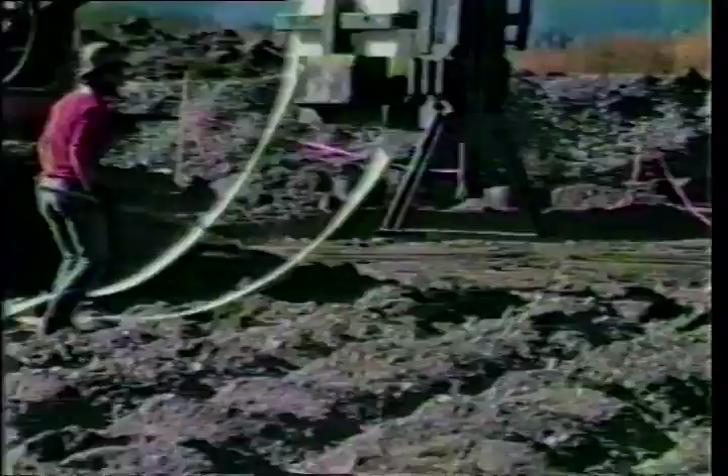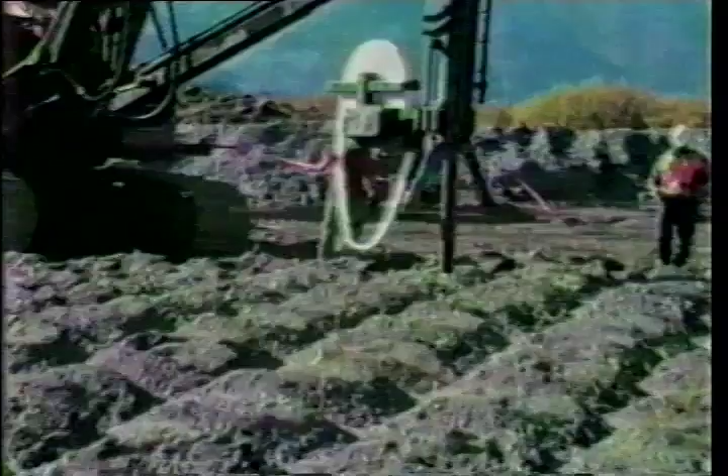Prefabricated vertical drains, which are commonly called wick drains, can be installed to accelerate consolidation for purposes of reducing subsequent settlement and for increasing strength. In a recent case, wick drains more than 200 feet long were installed through a large tailings dam. The purpose was to accelerate the consolidation of both the fine-grained embankment material and the foundation clays to alleviate an instability condition. Some studies have been made recently to determine if wick drains can also be used in silty and clayey sands to enhance densification by vibratory methods.

Drainage blankets are commonly placed over ground that has been treated using stone columns to prevent buildup of excess pore pressure and facilitate the rapid removal of any water that drains into the columns. Gravel columns or gravel-filled trenches are sometimes placed around the perimeter of zones that have been densified to prevent liquefaction. The purpose of these drains is to intercept excess pore pressure plumes before migration into the treated zone can result in strength loss.

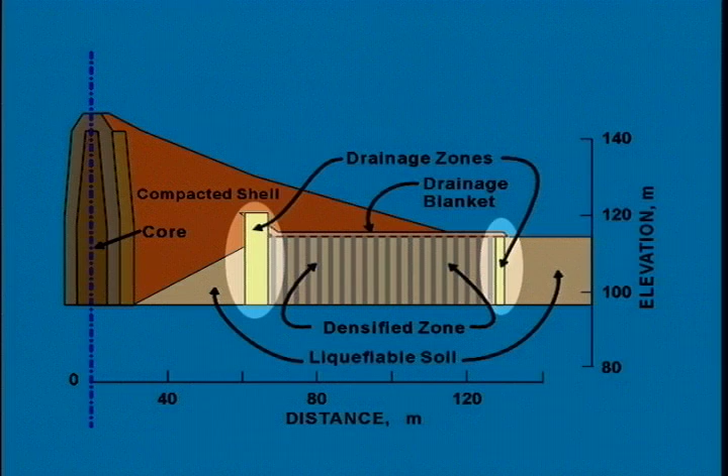I have now provided a brief overview and illustrations of methods that may be used in ground improvement applications for dam safety. Much greater detail, along with numerous case history applications, is given in readily available references. Specialty contractors experienced in the use of the different methods are very valuable sources of information, especially about materials, construction procedures, and costs. With respect to the latter, the total costs for any specific project depend on many factors, and it is difficult to generalize.

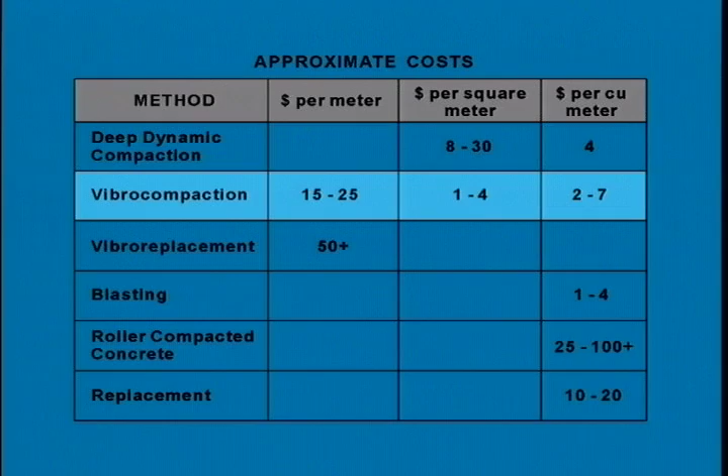Nonetheless, the different treatment methods may cost very different amounts. For example, the cost of densification by explosive compaction is likely to be much less than that by vibrocompaction on a per unit volume of ground improved basis. Similarly, compaction grouting and jet grouting are more expensive than stone columns. Some very approximate costs in 1998 for different methods of ground improvement are given in the table. These figures are intended as rough guides for equipment mobilization and treatment under normal conditions.

Each ground improvement project is unique in many ways. Therefore, a prescriptive procedure for analysis and design that covers all the important aspects and fits all situations is not now and probably never will be possible. Nonetheless, a general procedure that incorporates several steps is often helpful in arriving at good solutions. The determination of the need for ground improvement and the development of ground improvement design might proceed in the following way. First, define the project and project performance requirements.

What is the ground improvement for? What are the settlement, deformation, and seepage limits? What factors of safety are mandated? Second, what special demands will be put on the facility? Will it be subjected to floods or earthquakes? The hazards must be analyzed and the loading that will affect the dam must be quantified.

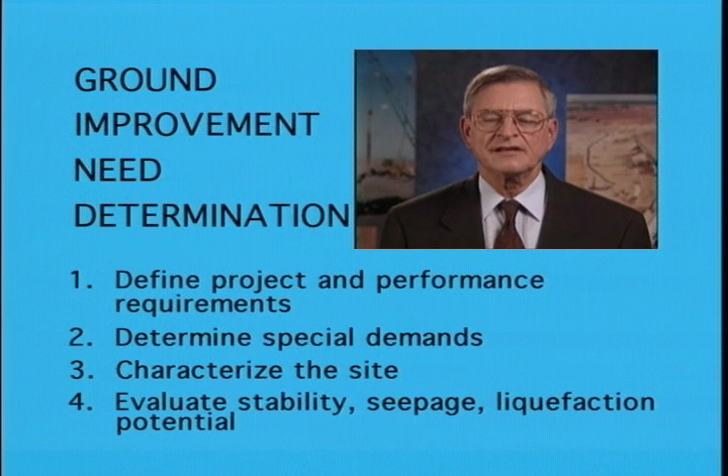Third, characterize the site. What are the strata? What are the properties of the materials that are encountered? What is the groundwater regime? Fourth, evaluate stability, seepage, and liquefaction potential so it can be determined if ground improvement is needed. If, as a result of these determinations, the need for ground improvement is established as the best approach for mitigation of the problems, then a series of design steps can be followed.

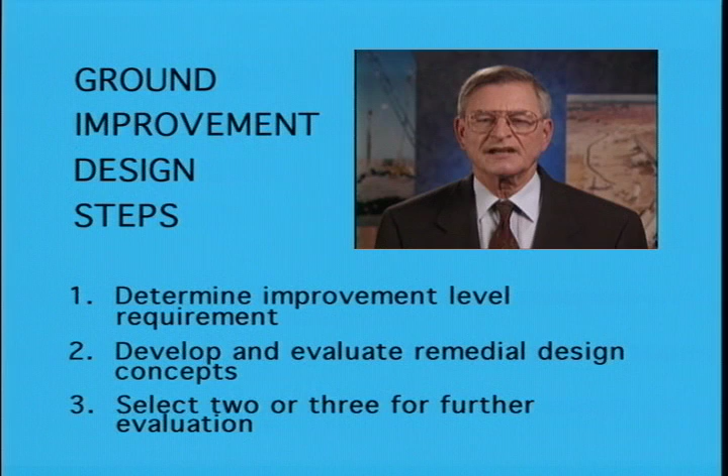First, establish the level of improvement required to ensure satisfactory safety and performance. Second, develop and evaluate remedial design ideas. Concept meetings for brainstorming possible treatment strategies can be very effective at this stage for identifying all the schemes with potential applicability. Third, consider the pros and cons of each concept and select 2 or 3 for further evaluation.

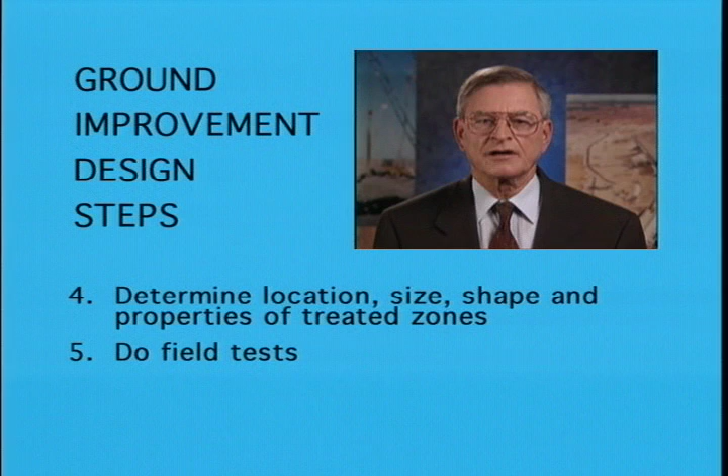Fourth, establish the location, the size, the shape, and the required properties of the treated zones. Fifth, do field tests to determine if the methods will really work, to confirm the design assumptions, and to develop construction procedures. Sixth, prepare specifications and develop QC/QA programs.

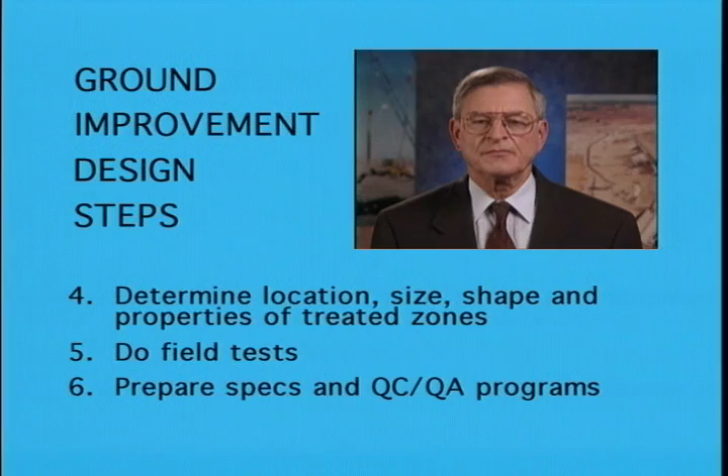In this video, I have described the types of dam safety projects and problems that might be addressed using ground improvement. Some general aspects of different methods, how they work, and how they are evaluated were considered. Then each of several specific deep densification, grouting, mixing, and drainage methods were described in more detail. Finally, considerations in the selection of method and design of the treatment were described.

In the next video, I will show how several of the methods that have been described in this video were used on 3 important dam projects. Each case history involves special problems that needed to be addressed by the choice and implementation of these methods.